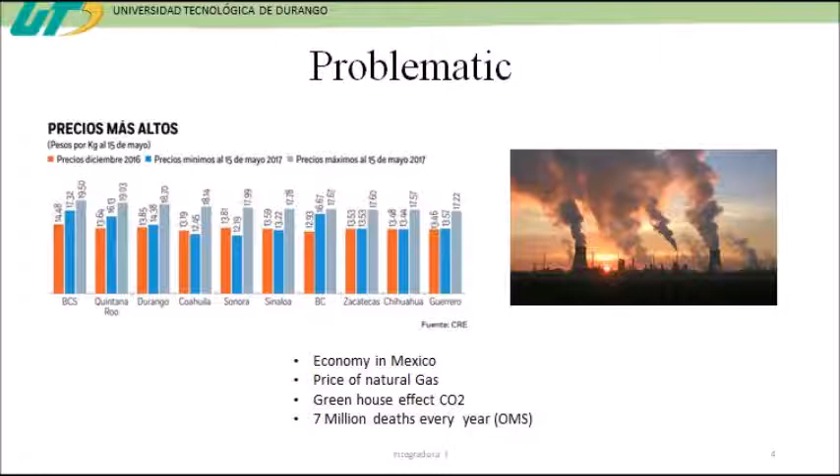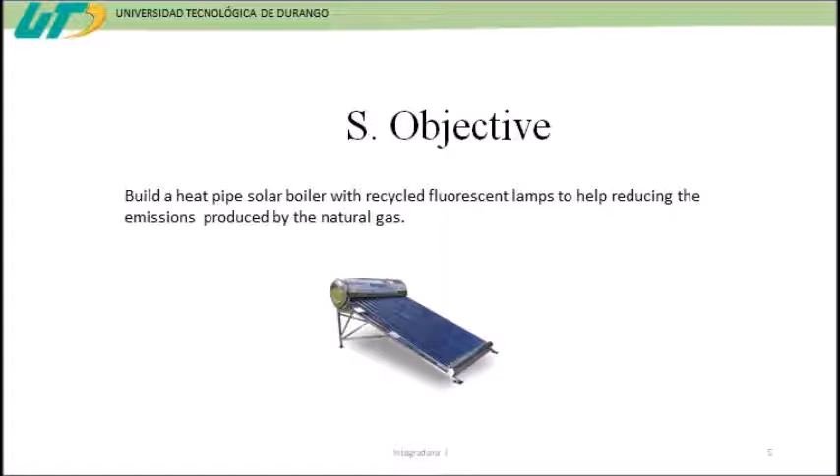General objective: build a heat pipe solar boiler with recycled fluorescent lamps to help reduce the emissions produced by natural gas. And the specific objectives:

The first objective is to make a documentary research. Next, to design the boiler, select materials, and build the solar boiler.

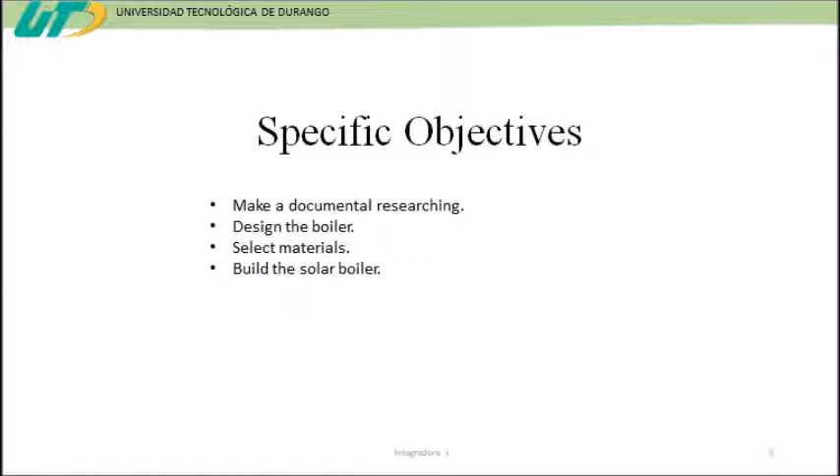Another problematic: Mexico emits about 435 million tons of CO2 a year, of which 200 million are due to the burning of fossil fuels such as natural gas and gasoline.

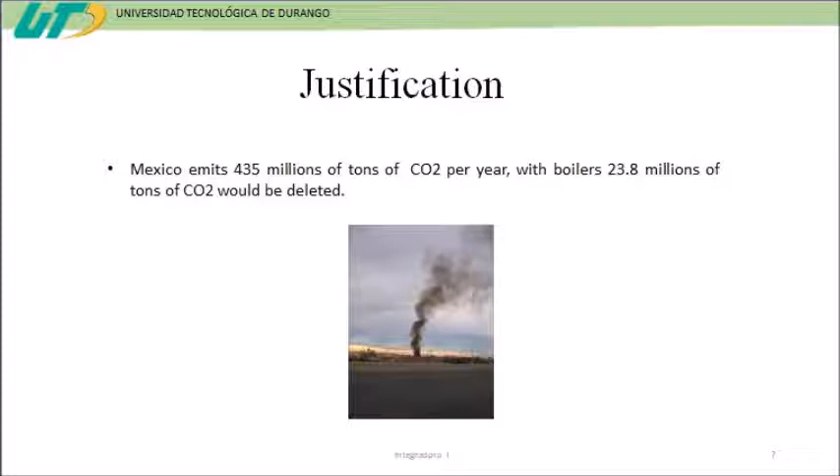By implementing solar heaters throughout the country, the emission of 23.8 million tons of CO2 per year will be avoided.

Durango is one of the locations with the highest radiation in the world, with an average of 551 watts on meter squared, while the world average is 313 watts on meter squared, which makes it the state with great solar potential, which can be used to heat water in a clean and sustainable way without the need to burn any fuel.

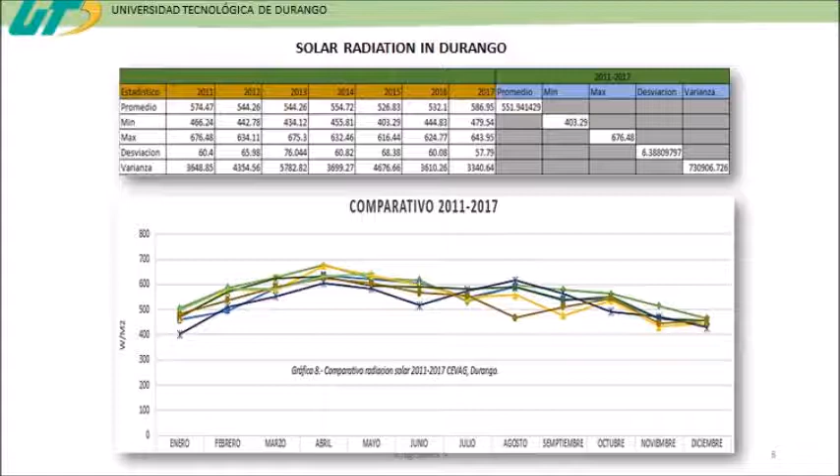In addition, there are still many fluorescent tubes in operation that will become waste in a short time, most of which will be dumped in a garbage dump without the proper care that should be done, and contaminate. Recycling the tube is a good option to avoid this.

Conventional solar heaters use vacuum glass tubes to heat water, as glass is a great thermal conductor and is excellent for this task. Reusing fluorescent tubes to perform the same function is a feasible option to prevent them from ending up in a garbage dump, causing even health and pollution problems.

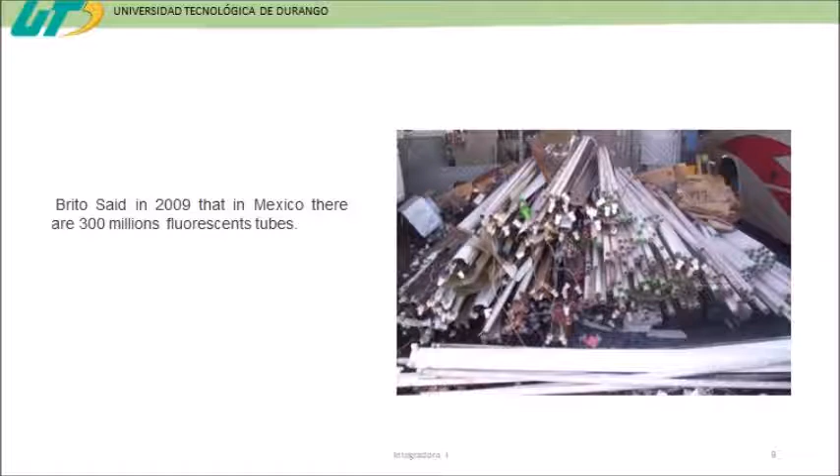And then the third one is the concentration system, which is mostly used in industrial processes because this reaches higher temperatures, up to 120 degrees Celsius. So this is mostly used in industrial processes.

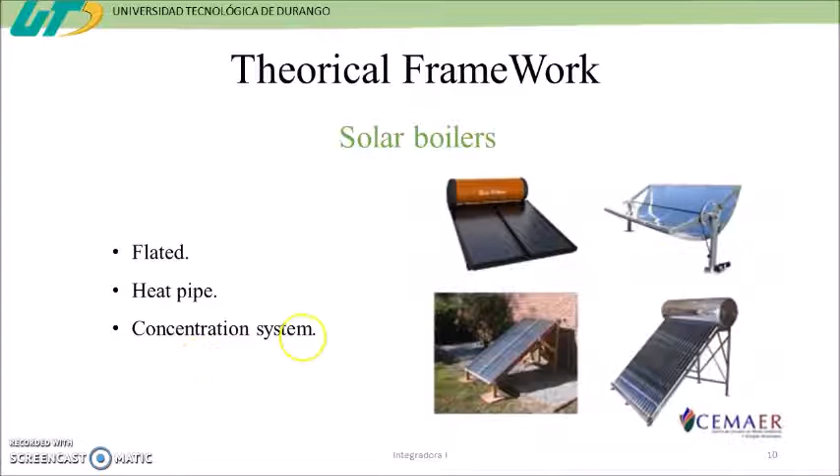Then we should know about heat transfer. As you know, this thermal machine works with the radiation of the sun, so it receives radiation, which are waves produced by the sun, which produce heat, which is one way of transfer.

And then there is also conduction, which is the most common one, when you directly apply heat to one material and then it gets warmer and warmer until the whole material has conducted the heat. And then convection, this works with the air: the currents of air get warmer and warmer until they go up because they change densities, and they transfer heat from the air. So there are basically three types of heat transfer: conduction, radiation, and convection.

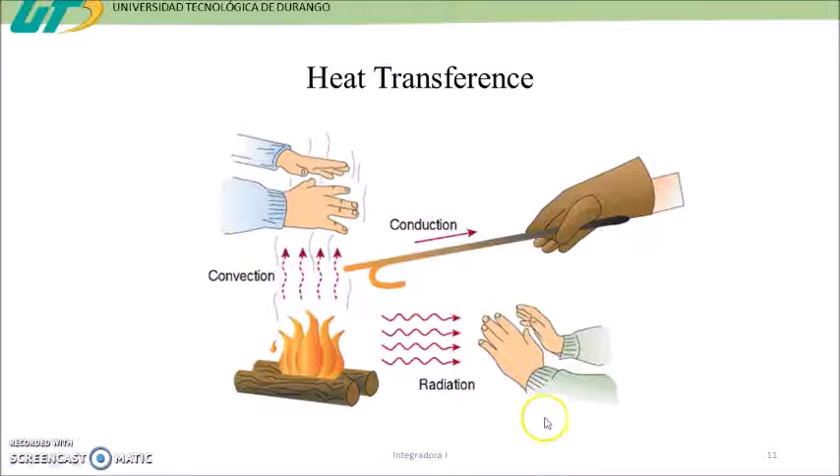I'm going to explain the operational work of the heat pipes, which are going to be used in our prototype. The operational work is basically this one.

The sun gives us radiation which comes into the tube, which is vacuum right here, no air between the tube. So the radiation comes directly to a copper tube, which gets the heat, and right here there's water. So as this gets hot, the water gets warmer and hot, and by density changes, the hot water goes up and the cold water stays right here.

So this is the simple explanation of how it works. The cold water goes down, and then when the cold water is heated, it goes up by density changes.

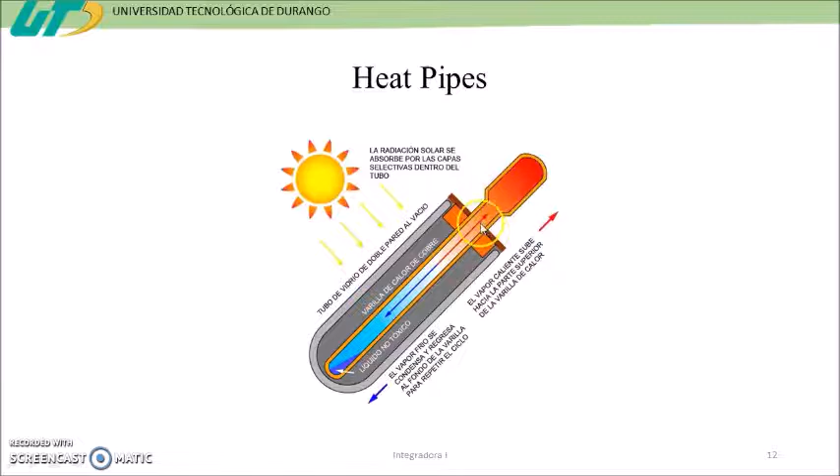The design is really important in this thermal machine because it's gonna give you the hot water when there's no sun. So this is the design, made in SketchUp, of the exterior tank, because there are two tanks involved in a solar boiler.

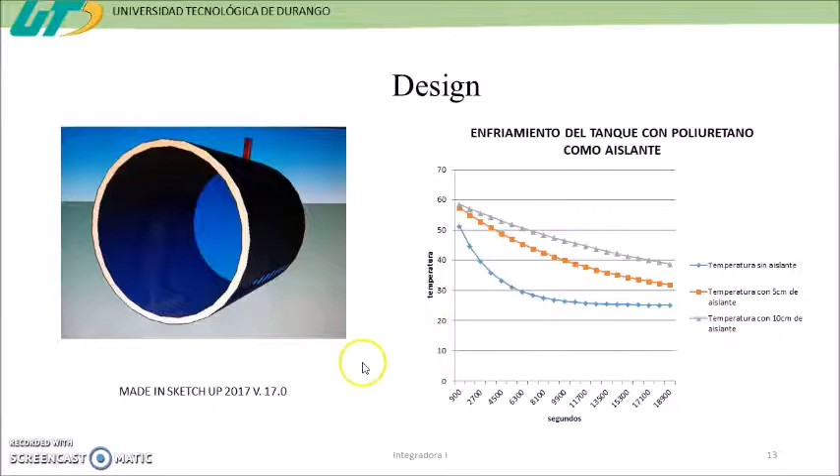This is the design of the full prototype, which consists of the external tank, and right here inside of this tank there's the polyurethane, and then the inside tank which holds the water, and then the tubes right here, the copper tubes, and then the lamp tubes over here. This is the realistic design of it. And this is the thermal tank, the exterior thermal tank, drawn in SketchUp. These were made on SolidWorks.

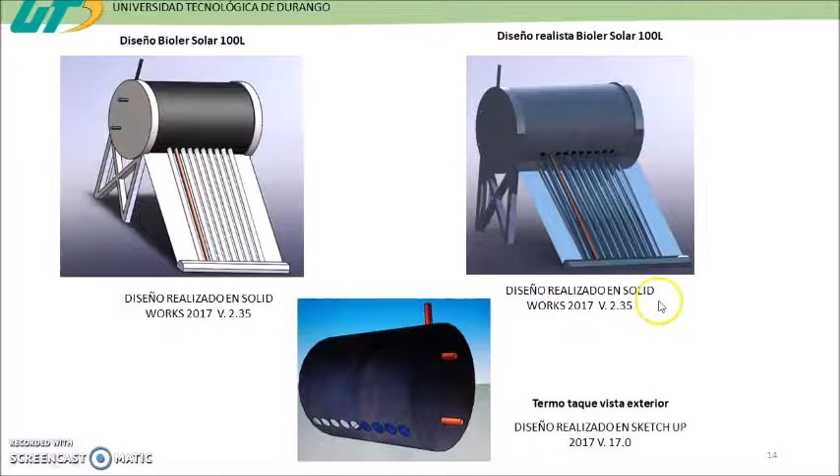The material for making this prototype was 9 copper tubes with a diameter of 1/2 inch, 9 fluorescent lamps for making the greenhouse effect and getting the copper tubes hotter. Then the plastic container, which is going to contain the water, the iron container, which is going to contain the plastic container, and 2 meters of PTR, which is a profile made of iron, to make the general structure of the prototype.

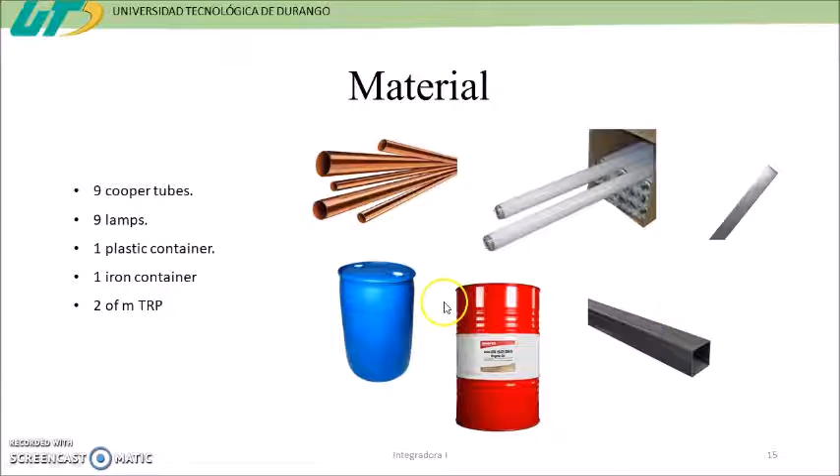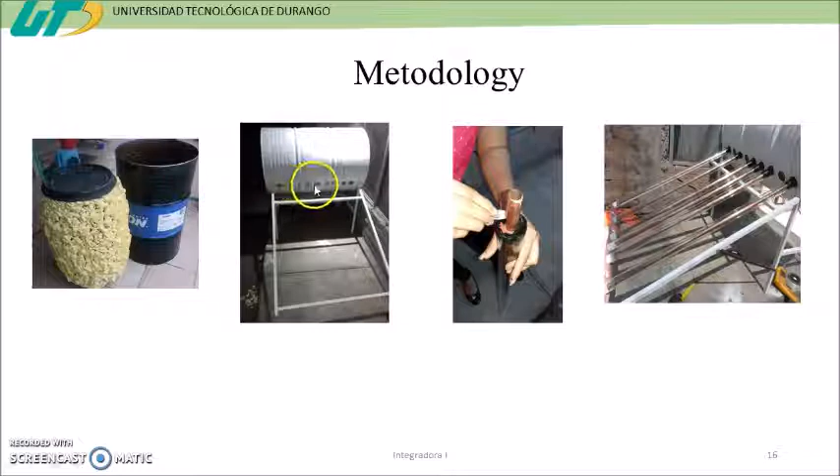The methodology, the process of making it, was not easy, but it is possible to make it. First, we add the polyurethane to the exterior of the plastic tank, and then we put it inside of the iron tank to make the holes where the tubes are gonna fit into the tank. And then the structure was made with the profile.

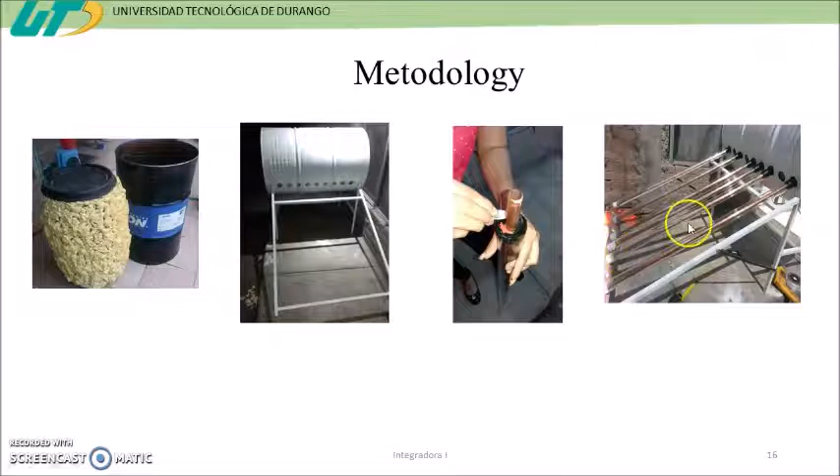Next, one of the most important parts was sealing the tubes, making these containers and sealing them to get it hotter. So we sealed with high temperature glue to not have problems with filtrations of water inside of it. And after this, we put the tubes inside the tank, and we give it the shape it has. And after that, you should add more polyurethane and seal it to not have any filtration of water. So it has to be sealed perfectly.

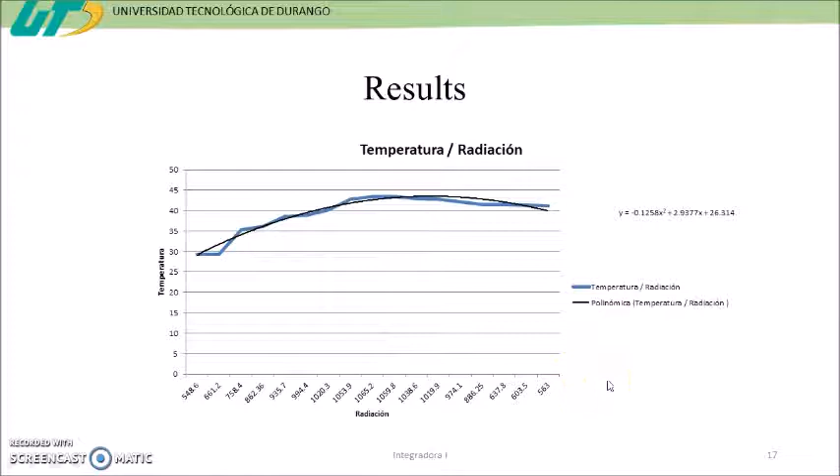The conclusions: I can conclude that the boiler is efficient because it has 39% efficiency, which is not too good, but it's okay for the purpose. The solar boiler reaches 43.5 Celsius degrees, which is okay because the recommended temperature for taking a shower for adults is between 30 and 40 Celsius degrees, so it's okay.

Also, if you want more temperature, the modification that we could make is increasing the incidence area of the solar boiler, which is the copper tubes. We should use ones with more diameter to increase the insolation and accelerate the process of heating water. So if you change to 1 inch, you can reach temperatures up to 50 or 60 Celsius degrees.

And finally, we should be careful with the weather, because as you know, this only works with the sun, and if you don't have it, you should have a really nice thermal tank to keep all this hot water. And we also have to be careful with the mass of water, because if it's too much water, it's going to take longer to heat it to the temperature wanted.